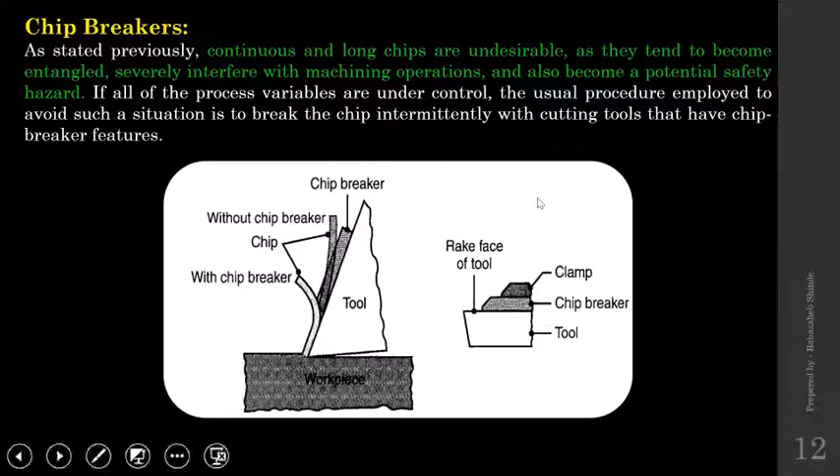Good morning all. In the last session, we talked about chip formation, single point cutting tool geometry. We started with this one. Then we talked about how chip exactly forms, and then what are the different types of chips, that also we have covered.

While talking about the types of chips that we generally observe in case of single point cutting tool metal removal, out of those chips, we came to know that the continuous chip is always desirable, because in case of continuous chips, the surface finish that you get is better compared to all other types of chips. So having this continuous chip will be good, but it has got certain limitations.

What are the limitations associated with the continuous chips? The continuous chips are going to have more length compared to other types of chips, and because of that length, they usually start getting tangled about the cutting tool, and in worst condition it could be harmful to the machine operator also.

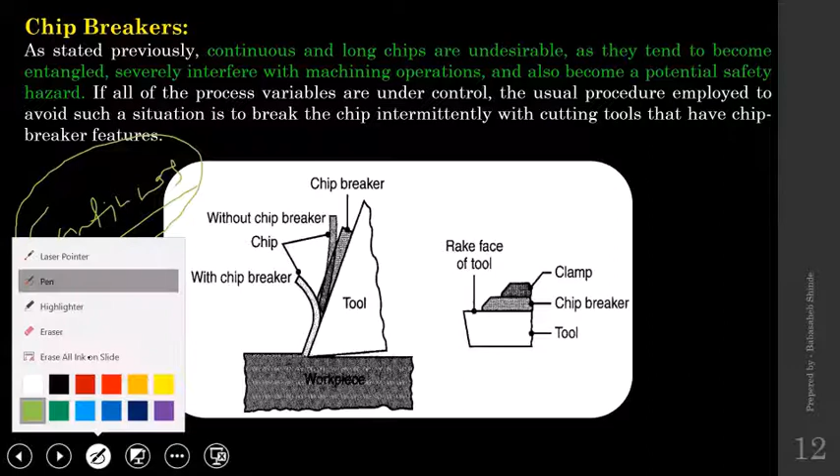So even though the continuous chips are desirable because of the surface finish that we can get, still their length has to be limited. And to limit the length of those continuous chips, there is one instrument that is used, and that instrument is called a chip breaker.

So what do we do with this chip breaker? Chip breaker is an additional structure that will be provided with a single point cutting tool. So this base is our actual cutting tool on which we have mounted this chip breaker, and to mount that chip breaker, the clamp is there, so that you can fix that chip breaker onto the cutting tool.

So what exactly does it do? Let's refer this sketch. In this sketch, the chip breaker is this one, fixed on this single point cutting tool. So when continuous chip forms, this chip breaker creates an obstacle to the flow of that continuous chip. So when that chip starts flowing across this rake face of the cutting tool, that flow will be restricted.

That flow is restricted by the presence of this additional projection, and because of disturbing the flow of that continuous chip, the chip has to take another path, and that path makes the chip bend from its regular shape. Because of that bending, or additional deformation the chip has to undergo, the chip starts breaking. So instead of getting a continuous chip, once this much segment has formed, it falls off.

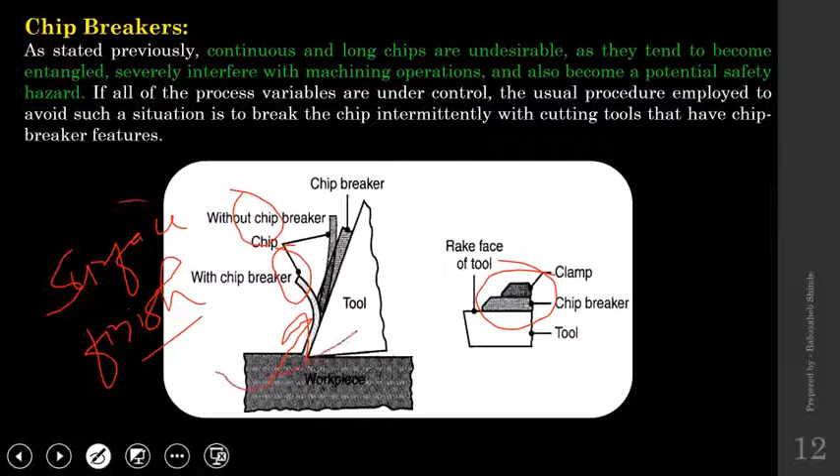Additionally, with continuous chip, the harmful effects of that continuous chip can be eliminated using this chip breaker, because there is continuous generation of continuous chip. We are not restricting that, but we are just limiting the length of that chip. So continuous chip will be there, good surface finish will be there, but length will be limited. So the tangling of that continuous chip across the cutting tool, or it becoming harmful to the machine operator - all those limitations will be eliminated.

So that way this chip breaker helps in the machining.

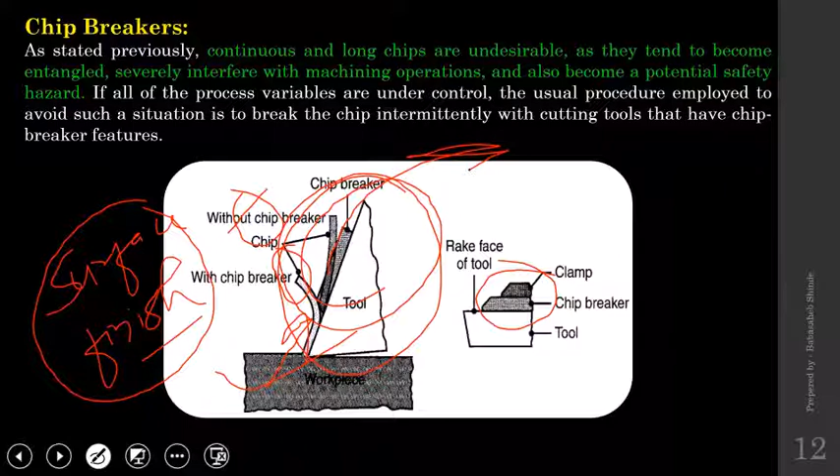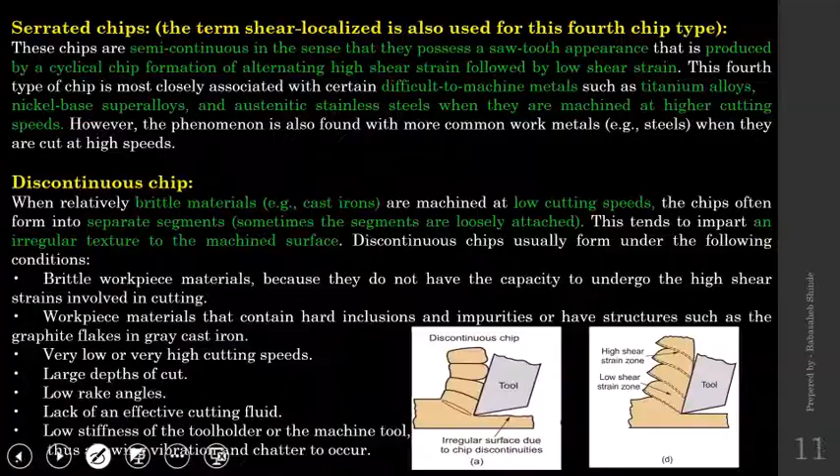Next, cutting ratio. This is quite an important parameter when somebody has to ask some question on metal cutting, let it be any competitive examination, GATE or any government examination - most probably the question would be based on this cutting ratio. So what exactly is this cutting ratio? To explain this cutting ratio, let me get you all back to the previous slides. Yes, over here.

In this sketch, the tool is going to move in this direction, and because of relative motion provided between the workpiece and cutting tool, chips will be generated that flow across this rake face and material removal will take place.

Now consider the condition at the beginning of metal cutting. This is the actual dimension of the workpiece. Initially the cutting tool would be somewhere here, and from here it will start cutting the material. This depth is the depth of material that is going to be removed by the cutting tool in a single pass. So when the cutting tool starts metal removal from here and passes all over this workpiece, this much layer of material will be removed.

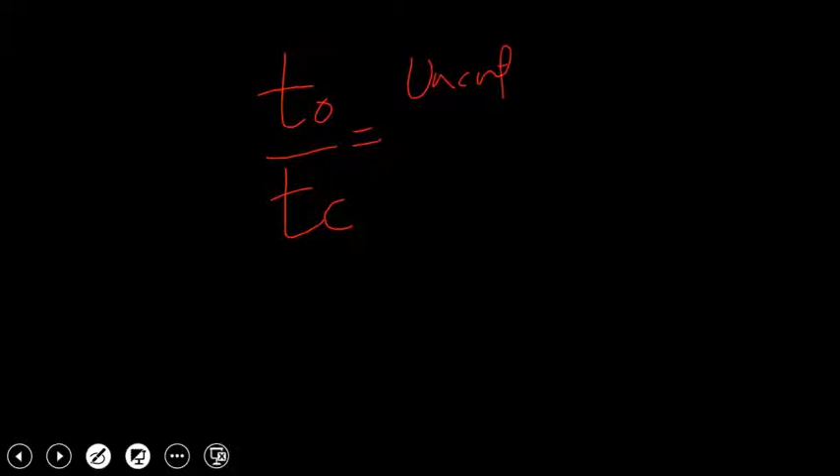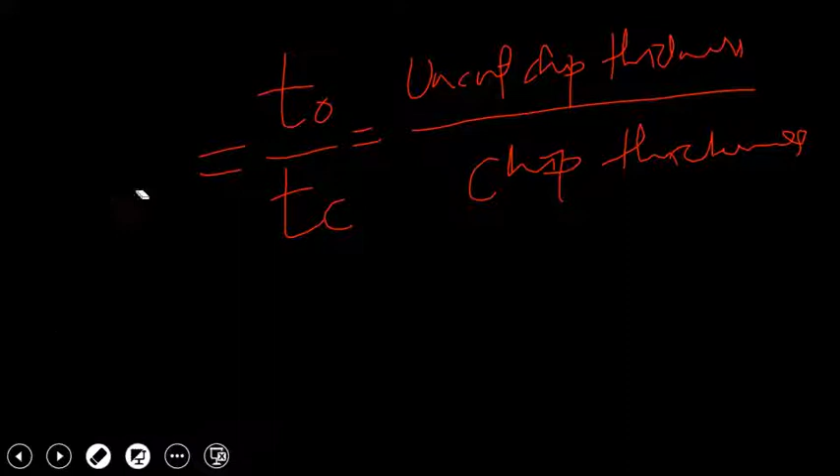Now if you take a ratio of those two, T0 by Tc, where T0 is uncut chip thickness and Tc is actual chip thickness, this ratio is denoted by R. So the ratio T0 by Tc, that is uncut chip thickness to chip thickness, this ratio is nothing but R, and R is called the chip thickness ratio.

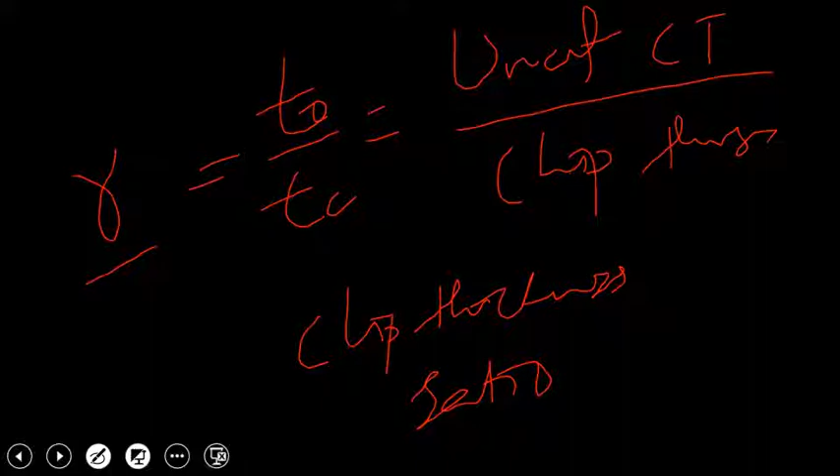Now when it comes to metal cutting, let it be any machining condition, whatever material you are machining, whatever cutting tool you are using, any machining speed, feed, or depth of cut, in all conditions Tc is always going to be greater than T0. It is like a universal truth in metal cutting. Tc is always going to be larger than T0. So what ratio are we taking for R?

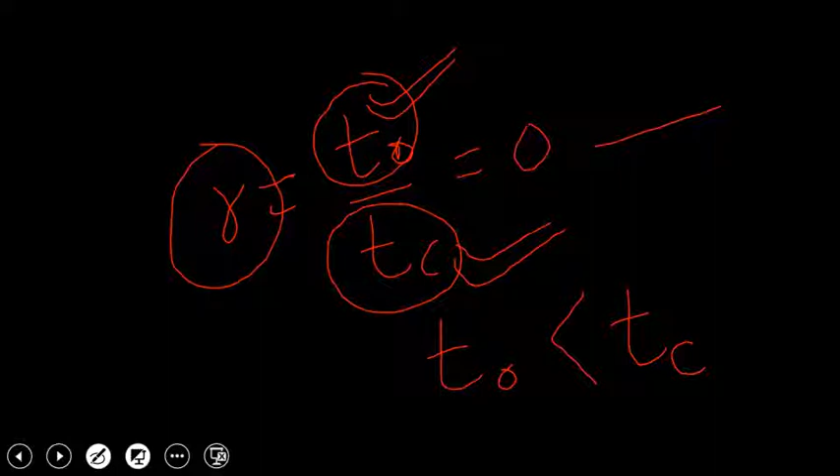R is equal to T0 by Tc. Since T0 is always smaller than Tc, this ratio will always be less than unity. It is always going to be 0 point something, because the numerator is smaller and the denominator is greater. Remember this, the chip thickness ratio is the ratio of uncut chip thickness to actual chip thickness, and since uncut chip thickness is always smaller than actual chip thickness, the ratio always lies between 0 and 1. It is never going to be greater than 1.

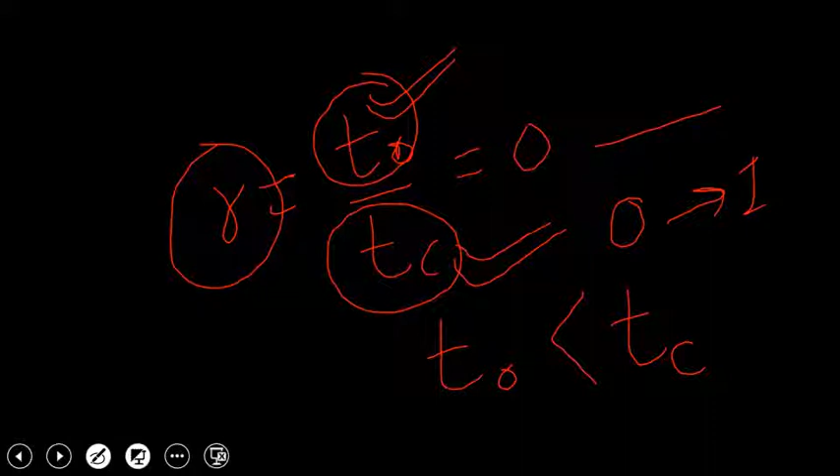Now along with this ratio there is one additional ratio, called the chip compression ratio or chip compression factor. So this cutting ratio, also called chip thickness ratio, terminology varies depending on the author, whoever is writing the textbook, whether it is called chip thickness ratio or cutting ratio, both are denoted by R. Similarly, there is another ratio called chip compression ratio or chip compression factor, also called chip reduction coefficient.

So all these three terms indicate the same parameter. We know that R is equal to T0 by Tc, and it is going to be 0 point something. Now if I reverse this ratio, taking Tc by T0, or simply the reciprocal of the cutting ratio, 1 by R equals Tc by T0. Now the denominator is smaller and the numerator is greater, so this is always going to be greater than 1.

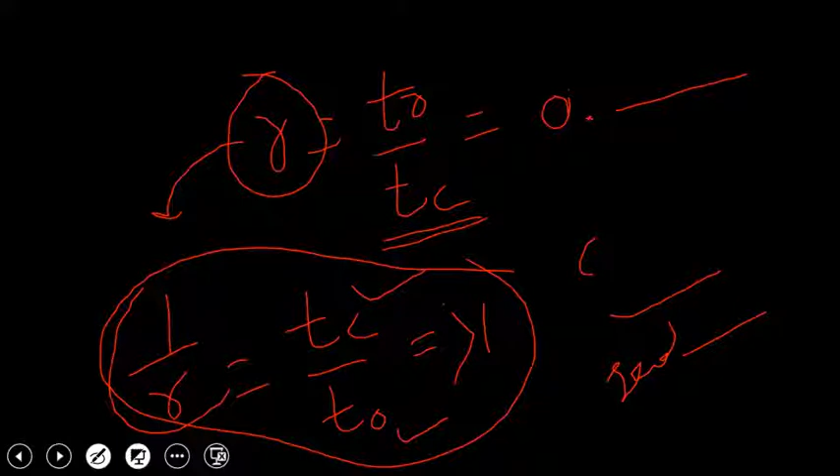This ratio is called the chip compression factor, chip compression ratio, chip reduction ratio, or chip reduction coefficient. So the reciprocal of chip thickness ratio or cutting ratio is the compression ratio or compression factor. Now what do we get from this compression ratio or factor? It helps us know by what amount the chip has expanded.

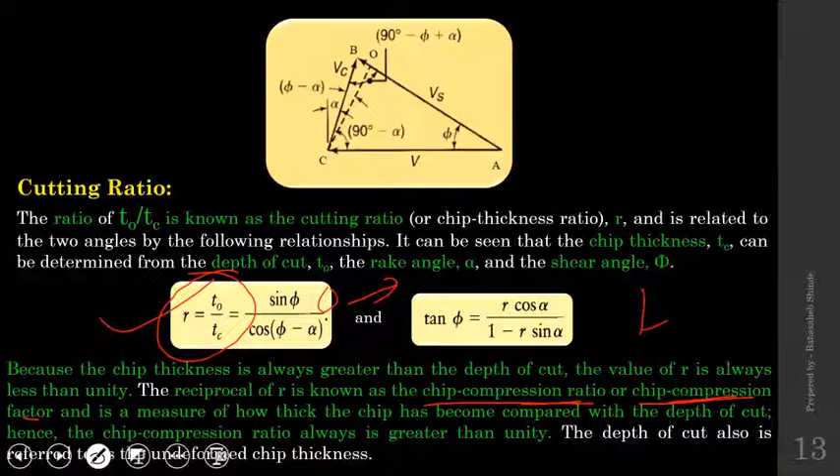Because if you look at the sketch we used, this is T0 and this is Tc, so from the sketch you can easily see that Tc is greater than T0. By what amount Tc has expanded compared to T0, that value you get from the chip reduction or chip compression ratio. Remember, R equals T0 by Tc, always between 0 and 1 — this is the chip ratio, chip thickness ratio, or cutting ratio. The reciprocal is the chip compression or chip compression ratio or factor, also called chip reduction coefficient, which is always greater than unity because its numerator is greater than its denominator.

Next, shear strain. So the terminology that we are going to talk about is shear strain.

Before talking about shear strain, let's talk about strain first. So what is strain? Can anyone let me know? You can unmute and speak, or put it in the chat window. You have studied strength of materials, right? Strain was the concept you might have studied there in detail.

Mrityunjay, can you tell me what is meant by strain? So the ability of a material to resist deformation while applying load. No, Mrityunjay. Change in length upon original length.

Very good. Strain is basically a ratio. And what ratio is it? It talks about change in dimension delta L by its actual length. I have considered length here, but the generalized statement would be that it is change in dimension to its original dimension. So let it be length, width, thickness, anything. The strain is nothing but change in dimension to the original dimension.

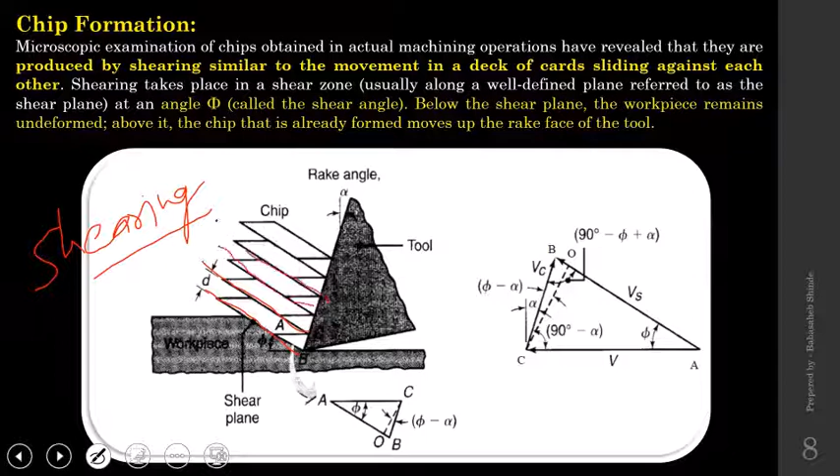Now this concept we are going to convert into shear strain. Why are we talking about shear strain? Because in single point cutting tool metal removal, the basic phenomena that helps remove the material is shearing. Material is removed by the shearing action. Shearing is nothing but moving of one layer of material across the other in the form of segments, and that motion is called shearing.

Now when this shearing takes place, if I consider this is the single point cutting tool, and at this point it is in contact with the workpiece. If I consider the metal removal has just begun, the cutting tool is moving in this direction. So from here, the material is going to be under compression.

Once that compression has passed some limit, there will be a deformation and the material will start to shear across this plane. Now when that shearing takes place, the material will have certain deformation, and shear strain is nothing but that deformation to its original dimension. That ratio is nothing but the shear strain.

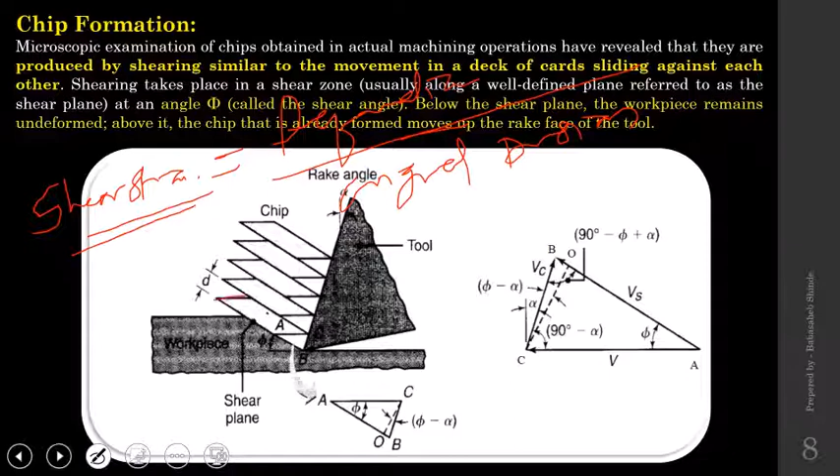So what is that deformation and actual dimension? If I consider this segment, this is one of the segments of the chip that has formed. Actually, how it should have been, it should have been like this one. This is supposed to be this segment, right? Both ends should be in contact with the cutting tool.

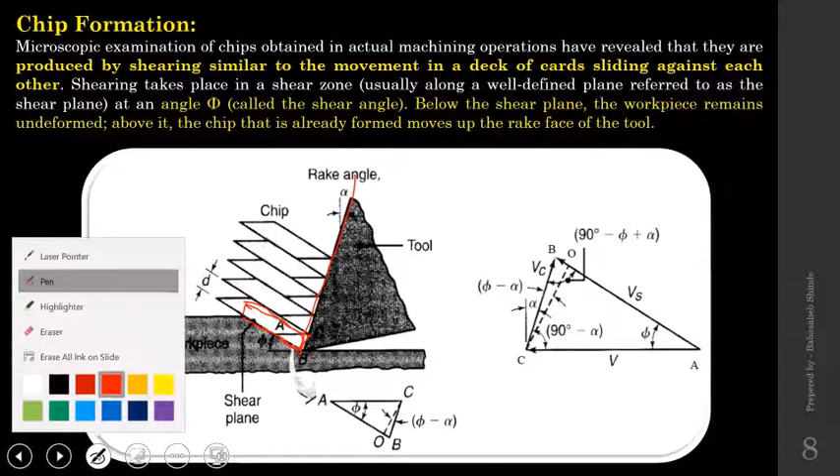But how it has changed, because of that plastic deformation, we are getting this segment. So to get this segment, this is the actual deformation that has taken place. So that deformation is nothing but this one, AB, because the same triangle we have drawn by rotating it. So that AB length is nothing but this deformation. And what is its actual dimension?

This is D. Now in this case, if I want to get this D, I have to—there is a C point over here, this is B point and this is A point, if you are able to see this sketch. So from this C point, I have to draw one perpendicular on AB. That's what I have drawn over here. This dotted line is perpendicular to AB and I get the point O.

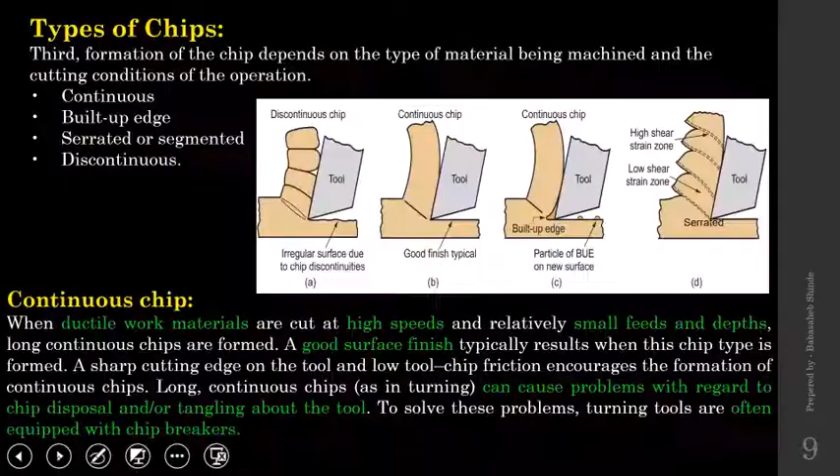So for this shearing strain, the relation would be AB by OC. So AB is the deformation, and the actual thickness of that chip is this OC.

Now this AB can be replaced by AO plus BO or OB. So what I have done, AB has been replaced with AO plus OB, and I have divided those two by OC separately. Now from this sketch, if I take the ratio of AO by OC, that will turn out to be cot phi. Phi is over here. If you take cot of that angle, you will get AO by OC. Similarly, this small segment is phi minus alpha, and if you take tan of that one, you will get OB by OC.

Okay, so that is not much of importance, just to explain what the sketch is exactly representing.

This shear strain relation brings into picture an important parameter, the shear angle. This shear angle is going to decide the performance of machining. What does it decide? It decides chip thickness, material removal rate, temperature generated, and also the forces generated during metal cutting. Because of all these parameters, phi has got certain importance.

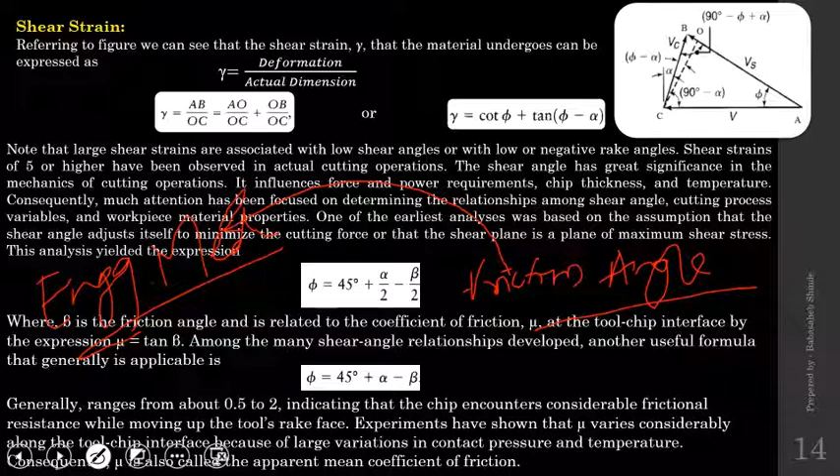To get this friction angle, you need to get back to engineering mechanics. If you recall the friction chapter there, you will get this friction angle. What is this friction angle? You can calculate this angle once you know the coefficient of friction, mu.

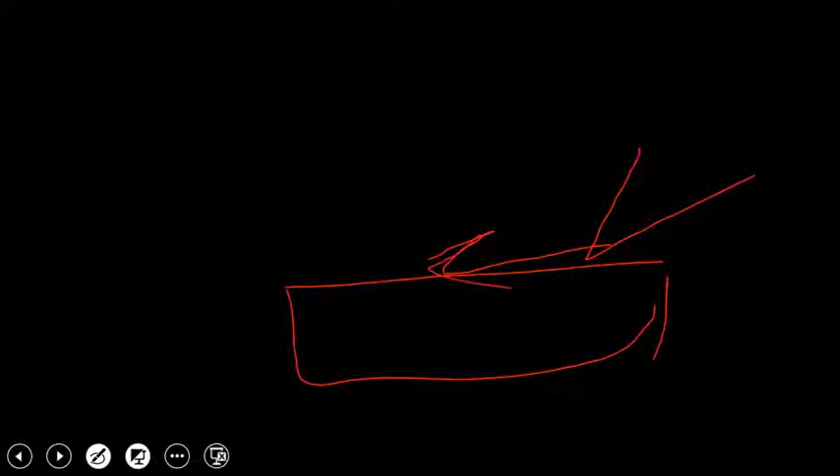In metal cutting, there is a workpiece across which the cutting tool has relative motion. When the cutting tool moves across the surface of the workpiece, the relative motion between cutting tool and workpiece causes some friction. Depending upon the condition of the cutting tool, material of the cutting tool, workpiece material, and other conditions, this friction has some coefficient of friction value.

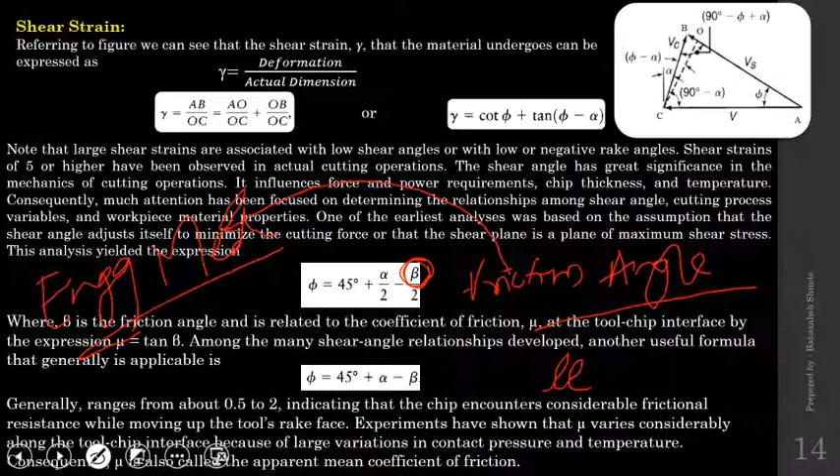Once we know that coefficient of friction value, you can calculate the friction angle using the relation mu equals tan beta, or beta equals tan inverse of mu. So once you have mu, take tan inverse of that and you get the friction angle. That way you can calculate this shear angle.

Okay, next important thing is velocities in a cutting zone. Now, how to calculate these velocities and what is their importance? Let's talk about that.

So if this is a single point cutting tool, this is the chip form, this is the machined surface, and this is the unmachined surface. This is the shearing angle. This is T0, this is TC, and the velocity with which this chip is flowing is denoted by VC, and V is the cutting speed.

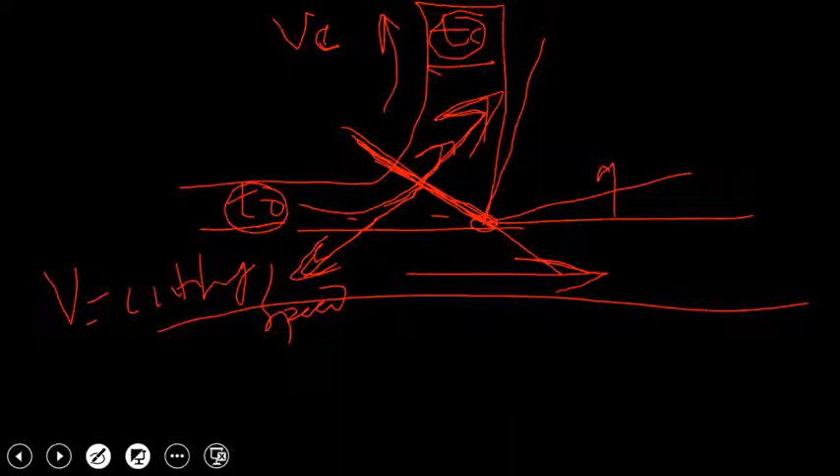So beyond this point, the condition is before cutting, and beyond this point, the condition is after cutting. We are going to correlate this condition with that condition, and for that we are going to apply the mass continuity relation. So what is the mass continuity relation?

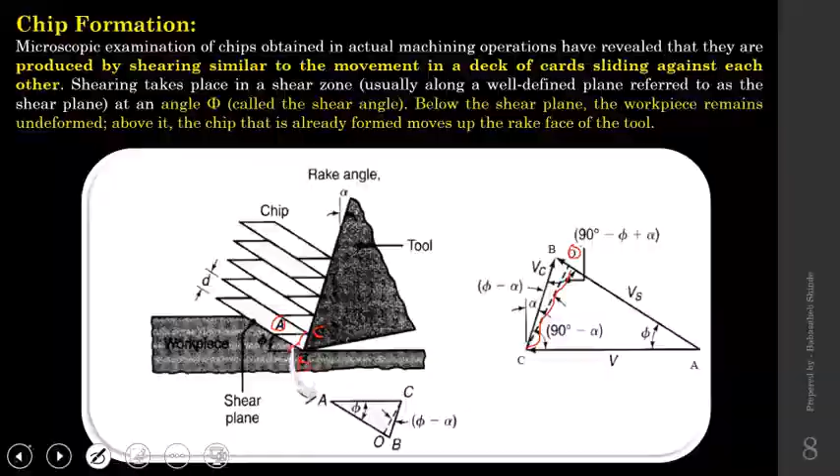V into T0... let me get you to another slide. Okay, let's use this relation. V is the cutting speed into T0, meaning the uncut chip thickness multiplied by its velocity, and that is equal to VC into TC. VC is velocity of the chip and TC is the chip thickness. So the product of T0 into V is equal to the product of VC into TC.

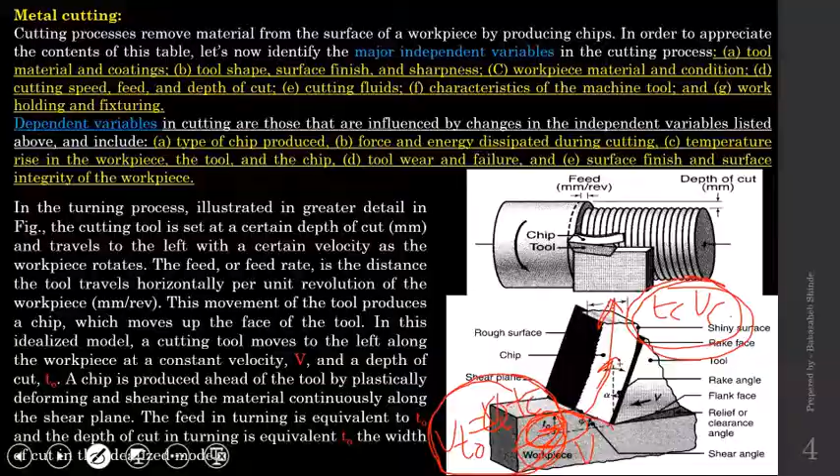So this is before cutting and this is after cutting. The total mass flowing before and the total mass flowing after, those two things we are equating. And when you equate those two, what relation do you get? V into T0 is equal to VC into TC.

Now we know that if you rearrange this equation, V into T0 is equal to VC into TC. Let's rearrange this. What do we get? V by VC is equal to T0 by TC.

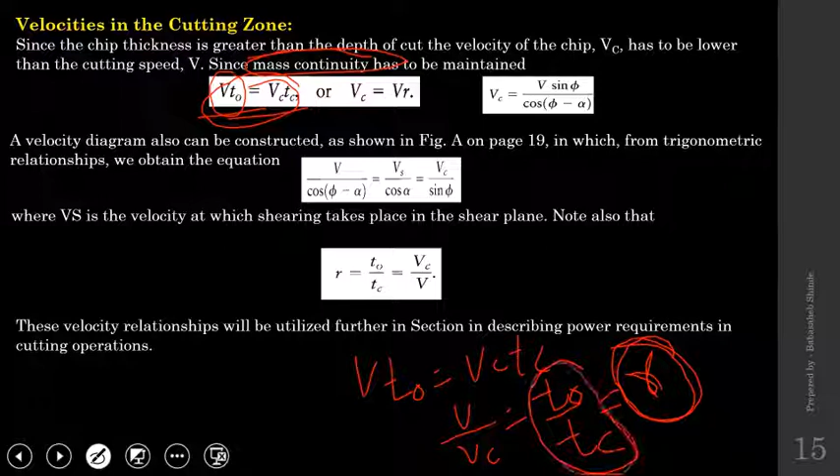And we know that T0 by TC is nothing but R, the cutting ratio or chip thickness ratio. So when you want to calculate this cutting ratio, you can either use T0 by TC, or VC by V, where V is the cutting speed and VC is the velocity of the chip. If you know either of those four, you can calculate the cutting ratio easily.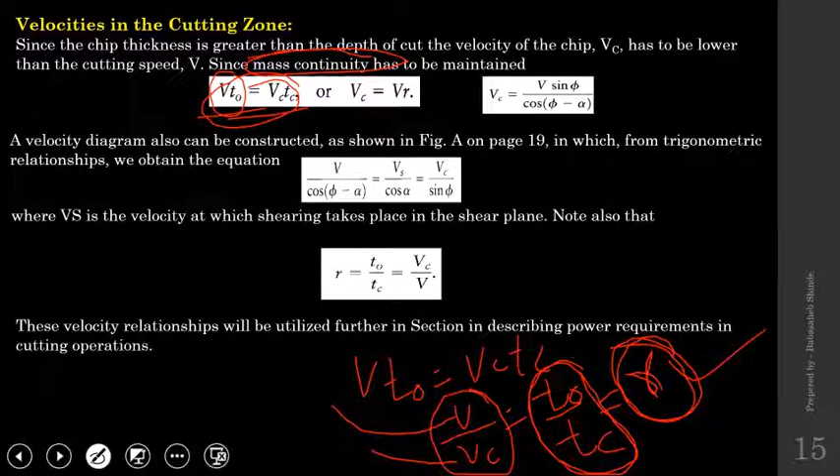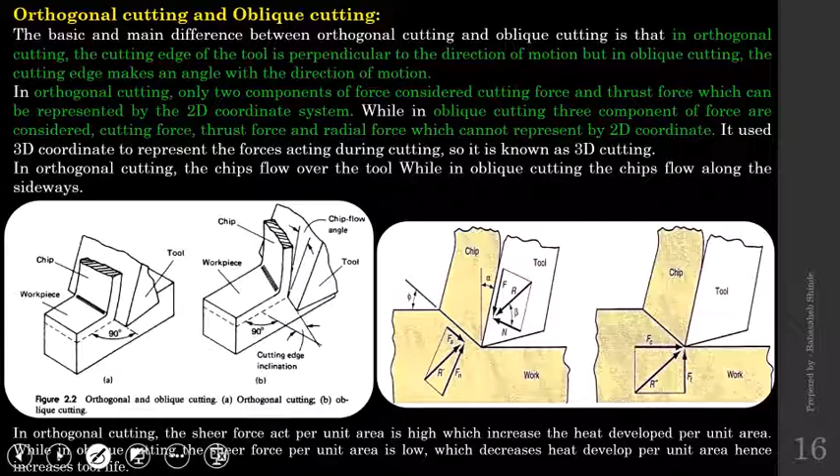Next is orthogonal versus oblique cutting. I don't think we can finish this in 2 minutes, because we have only 2 minutes before the meeting ends. So let's not move to this point, we will stop here. And if you have any doubt or query in the things we saw today, you can unmute and let me know.